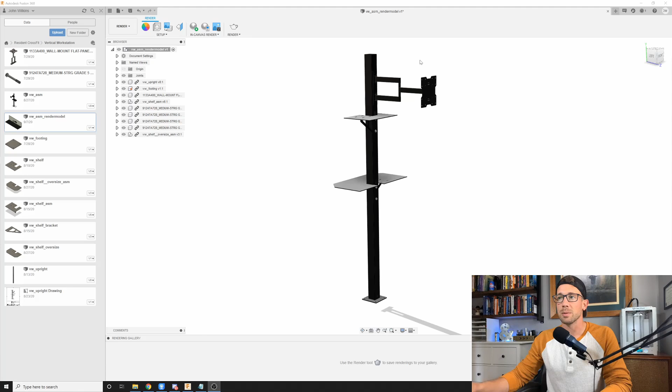And then the shelves are for either a computer or cable modem or something like that you would need to set things on. The bottom shelf can be used for a keyboard, mouse, that kind of thing. It's around 7 feet tall. This upright tube here is a 3-inch by 3-inch piece of steel tubing, so that kind of gives you a sense of the scale.

But the problem with this is that when I go to present them with this design concept, this is unrefined, I guess is the right word. It just doesn't really fit with the rest of their gym environment. So what I want to do is show them something that's going to be more like what they're going to see in real life. So the easiest way to do that in Fusion 360 obviously is with renderings.

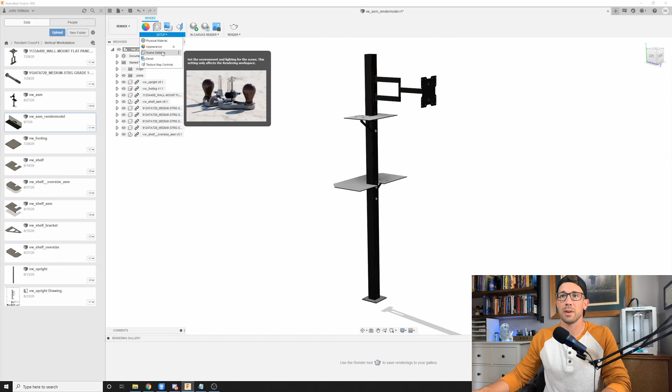So right now I am in the render workspace. They have ways to set environments. We can go to scene settings. They've got an environment library here that's got some different lighting. You can do all kinds of different things to set the scene around this object. But their gym is obviously not in a snowfield, that's not where this thing's going to go.

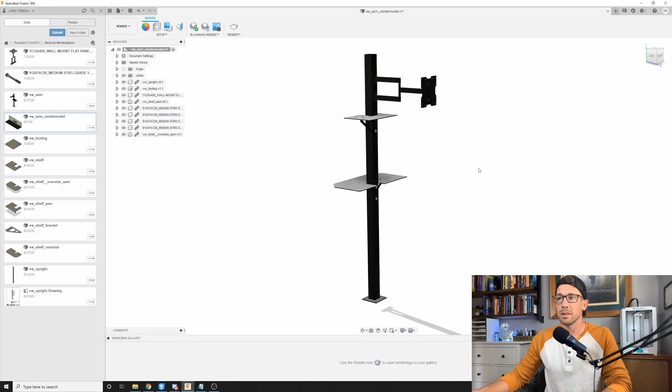So what I want to do is instead of use one of their predefined environments, I'm going to create my own. So their gym is a concrete wall. This is going to go against a concrete wall and a rubber floor. Really, really simple. In order to make this fit more in line with their environment, what I want to do is actually draw in that environment.

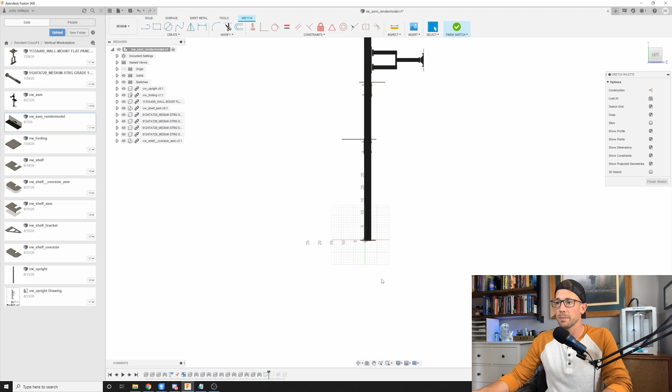So what I'm going to do first is I'm going to go back to the design workspace here. I am going to create a new sketch, and let's make it on this plane right here. So as you can see, my bottom footing's a little off here, but that's all right for the purposes of this. I'm going to go ahead and project some of this stuff on here, P. So now I've got a line. I'm going to say okay.

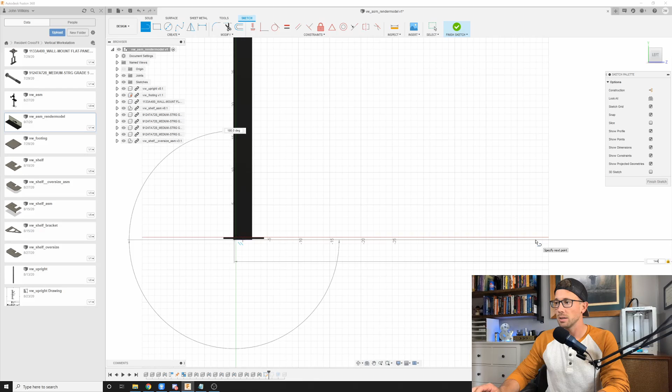I'm just going to draw out some environment stuff here. All right, so let's make this. We can make it whatever size we want. Let's make it pretty big so that we can really zoom in and out as needed. Make that 144. Actually, let's make it a little bit smaller. Let's make it 120. I think I might have my... Oh, they're on. Okay, there we go.

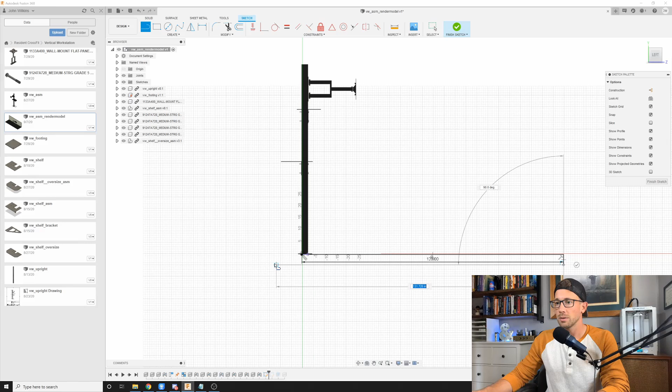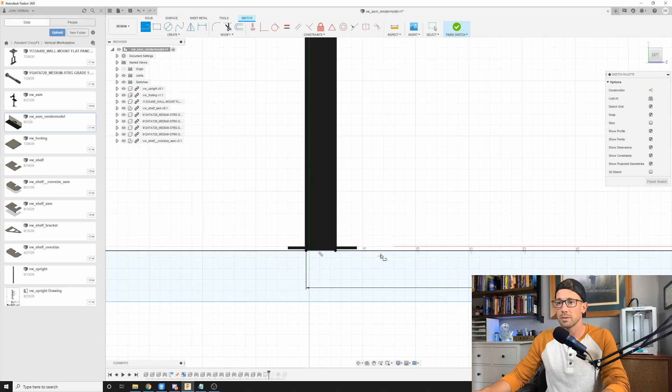I come down. This doesn't really matter here. I'm going to make a straight line all the way out. And I am not going to define any of these or constrain any of them. I'm just going to do some loose sketching here. Go here. And let's just close it off. All right, so we've got now this sketch of what I'm going to consider to be basically a floor and a wall. That's really what I'm doing here. I'm trying to create an environment.

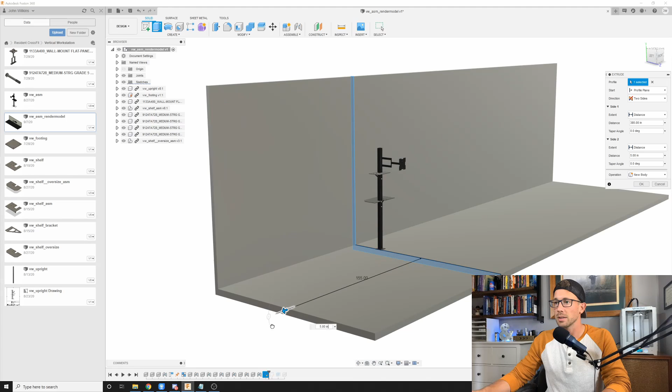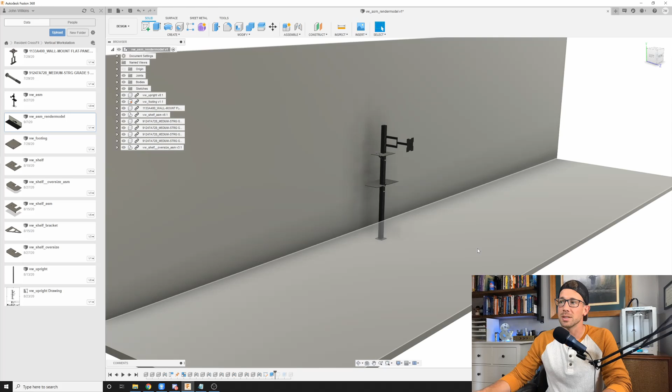I'm going to take this, I'm going to extrude it, and I'm going to go both sides, and I'm going to go pretty far, I think, just to be able to zoom in and out as needed. And I'm going to create a new body out of that, and I think that should work. All right, look at that. We've got a place. We've got a floor and a wall at least. All right, but this still doesn't work for us because it's gray, and their gym is not all gray.

So what I'm going to do here is now I'm going to set some appearances for each one of these faces. And Fusion 360 has built-in appearances, and you can download them. They are pretty awesome. I already have some of them in here, so you'll see right here I've got rubber set on this one. I've got the powder coating, obviously. This is a concrete one, and they're all found down here in this library.

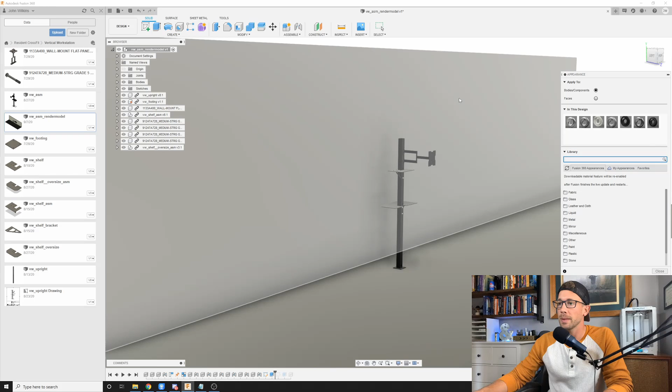So you can search. This is what I did to find the rubber one. I searched for rubber Fusion 360 appearance library. They've got different versions of it: bumpy, hard, soft, weathered, and then a silicone. I did the same thing with concrete to get this appearance right here. Downloaded it. Really simple. All right, so this wall in their facility is concrete. Okay, so what I'm going to do is I'm going to take this, I'm going to select faces, because I don't want to apply this to this entire body. I only want it on this face right here.

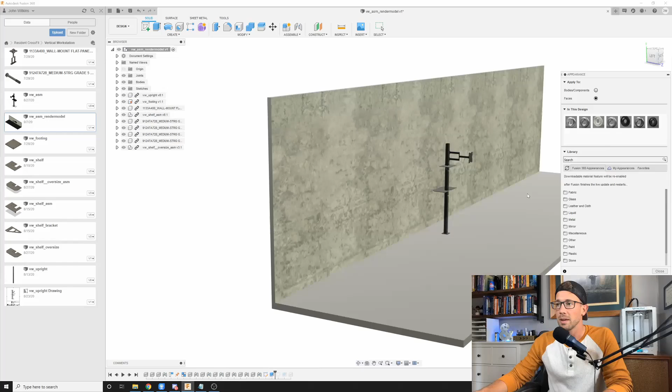So I'm going to go concrete on that face. Now, it's already starting to look better, but what you would notice if you just tried to do this right off the bat is that sometimes this pattern here can end up looking a little funky, and I'll show you what I mean. So I'm going to right click on the concrete appearance. I'm going to go to edit, and right here where it says scale, I'm going to drag this slider back to show you what it would look like as a default.

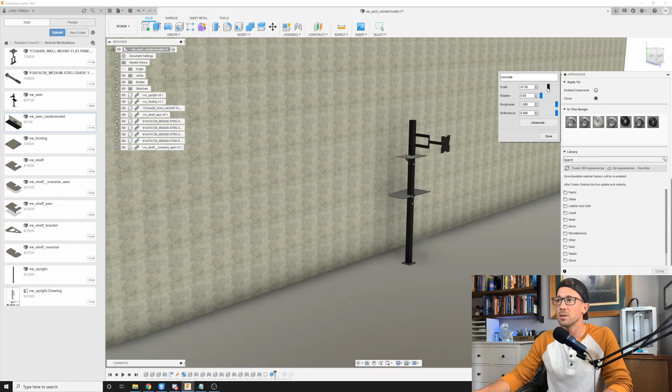This is a very repeated pattern because our surface is so large here. The face is so big that the scale of this is all off if you take it down. Obviously, this is not a nice natural looking concrete. So what I do to fix that, I'm going to take that scale and I'm going to drag it out. This gives me a much better picture of what some natural concrete might look like. You can also rotate it if you wanted to. I'm just going to leave mine at 0 because I kind of like the way this looks.

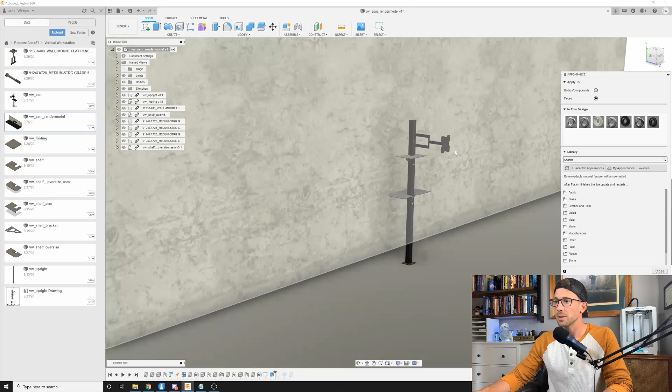Roughness and reflectance, depending on the appearance, you're going to be able to change those and see some significant change on your actual appearance. But for this one, you're not going to see a ton. I'm going to go ahead and click done here. It's giving me a warning, but it is because it's the default material there. So here we're good. We've got our concrete look now. That's kind of nice, but now we've still got this gray floor. We need to fix that.

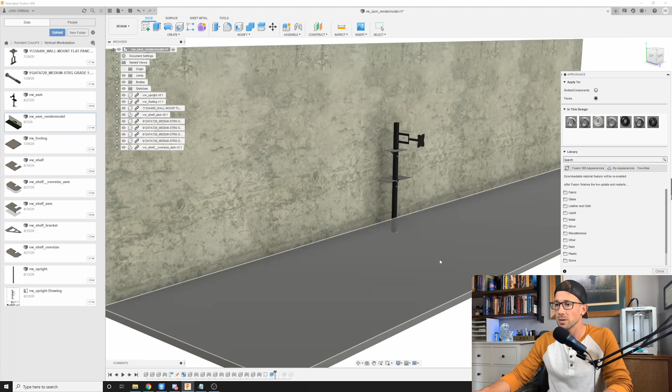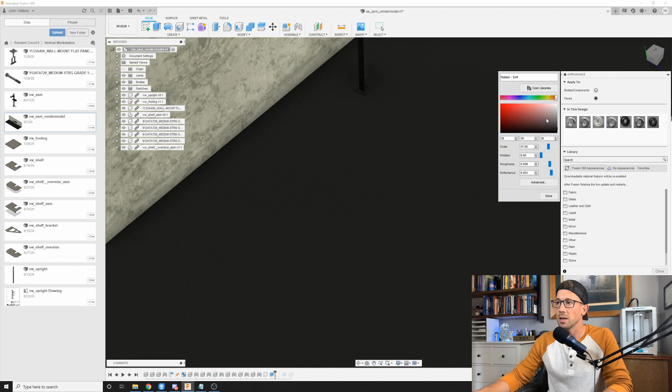So I downloaded the soft rubber material appearance, and I'm going to go ahead, take this, drag it down there. Now, this one's a little bit tougher to see, and some of these appearances take a little bit of experimenting. All right, so as you can see, I'm going to rotate, and we've got a decent rubber appearance. I don't know if you can see this, but again, I think what I'm going to do to try to set this appearance is I'm going to right click and go to edit, and you can change the color of this as well. So if it's a different color rubber, you can go ahead and change it. I'm just going to leave it as kind of like a grayish black.

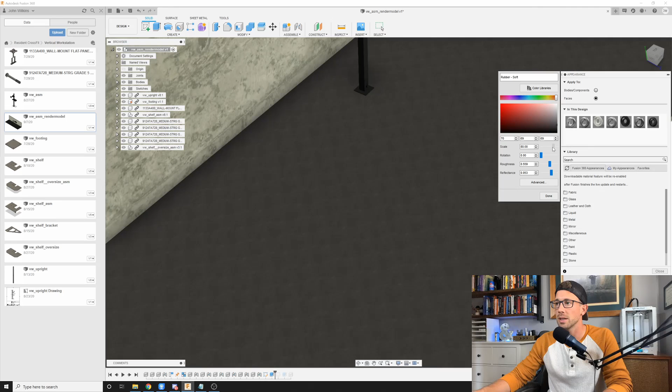I'm not going to make it perfectly black because I feel like that's going to blend in too much with my actual object here. So now I'm going to go ahead and change the scale like I did on the last one. Again, as you increase that scale, you're going to start to see that drag out. And here we're dragging back in. Now rubber is a little bit easier one to deal with. It doesn't have to be quite as natural. Actually, this looks kind of interesting if I do that. All right, let's go with this.

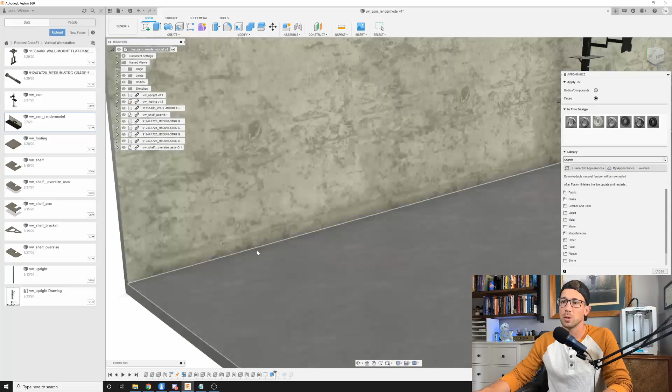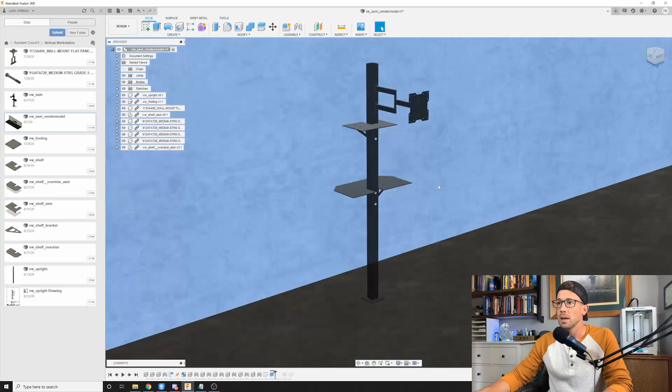So now I've got my rubber floor, my concrete wall. If I really wanted to, I could create some simple baseboard here or kind of round that edge to make that look a little bit better along this corner. But for the purposes of this particular rendering, I think this is actually going to look pretty good. All right. I'm going to go ahead and say close. And now, instead of being in the design window, I'm going to go back to render. I'm going to deselect this surface here, and now I can get this in a position that looks decent from a render perspective. Get it nice and straight there. Now's when I wish I had a 3D mouse.

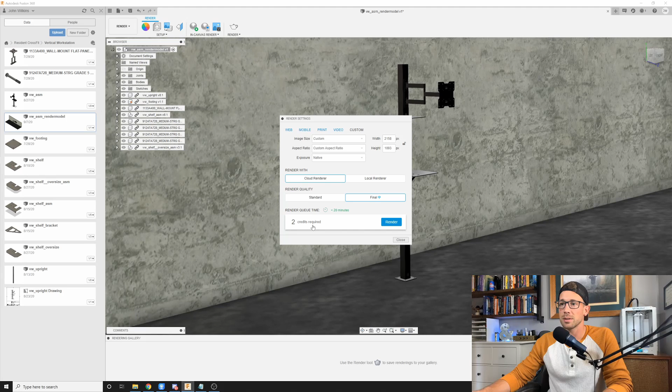And for the purposes of this render, I'm just going to do an in-canvas one. We could obviously do a traditional render and use some of our credits that we've got here, but I'm just going to do a local in-canvas render here. I'm going to go to my settings, make sure that everything looks all right here. Yeah, resolution max 100%. I'm just going to say okay, and go ahead and start the render. Now I'm going to pause this before we end, and you'll see the finished product at the end of the video. But for this, I usually like to at least get it out to the excellent dialogue here. These do tend to take a while, but I think what you'll find, and you can already start seeing it materialize here, is we actually have something that's going to be quite a bit more realistic than just an object over a white or gray background.

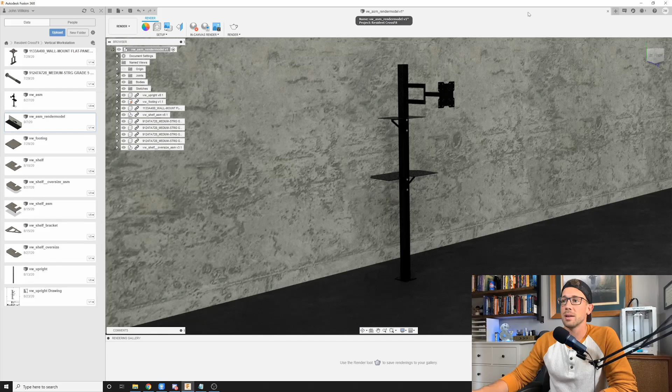And I think what we're going to do next time is actually show you how to get some cool lighting on this. That's a whole separate video in and of itself, but as you can see, we could really benefit from some shadow to make this look even more realistic, but that's a whole other topic. So as you can see, creating your environment is really not that hard, and makes a big difference when you're showing somebody what something could potentially look like.